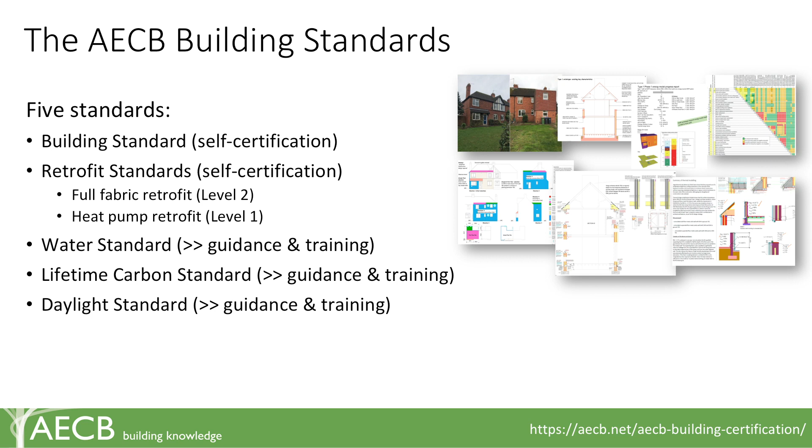We have a water standard, as you know, and then the lifetime carbon standard and the daylight standard are not actually certifiable standards as such. So we're going to be developing training to help people understand and deploy all of these standards in the next year. So that's where the direction of travel for training is.

So this new level 1 retrofit standard is based on the fact that we've challenged ourselves on the deep retrofit agenda. Deep retrofit is a very meaningful, useful thing to be doing, but it's not the only thing we should be doing. So we clearly need to get off fossil fuels rapidly. Heating by electric heat pumps offers an easy and potentially cheap route when combined with relatively light fabric retrofit. So it's not an intrusive approach, which a deeper retrofit obviously is, and that's what we're struggling with.

We do require good ventilation to be installed as part of that, and obviously we have an eye on the running costs after the retrofit, so we're trying to pay a lot of attention to the reality of the performance gap and make sure that after such a level 1 retrofit, heating costs are not higher than the fossil fuel system you've come off, so we're doing some economic modelling on that.

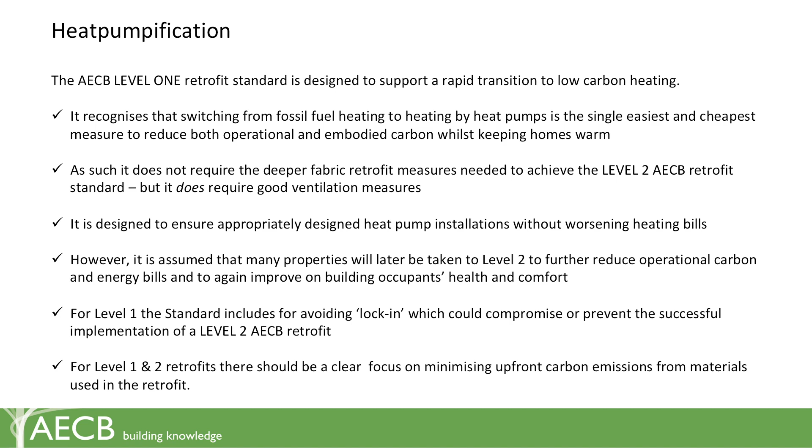We're not discounting going on to level 2, so level 1 is either a step towards a deeper retrofit, level 2, or those buildings at level 1 may well be sitting there operating on that level for years, 10, 20 years. And so we've been looking at what happens if we have 2 waves of retrofit, a level 1 and a level 2 over time, and I'll illustrate this in a minute. Is that still a meaningful thing to do?

Because one of the things we've been worried about in the past is people doing shallow retrofits which lock out future improvements. So the standard we've developed is designed to not block that second, deeper retrofit. So it's thinking ahead on a long-term plan.

So it's an overly complicated graph, but what it shows is the existing housing stock. And obviously what we need to do is to get that entire housing stock and shift it over here to reduce the space heat demand. So when you're thinking about reducing the need for heating, we have aspirational standards like EnerPHit, which will apply to a relatively small number of homes perhaps. I live in one, and it's very, very comfortable and very low energy. Very happy I did that.

The level 2 retrofit standard is less demanding, but still a meaningful and useful standard here, which is set at 50. Now, there are exemptions within the AECB level 2 for listed buildings or other very good reasons which we set out. So potentially, a certified level 2 retrofit could be demanding 100 kilowatt hours per square metre. So it's actually a range.

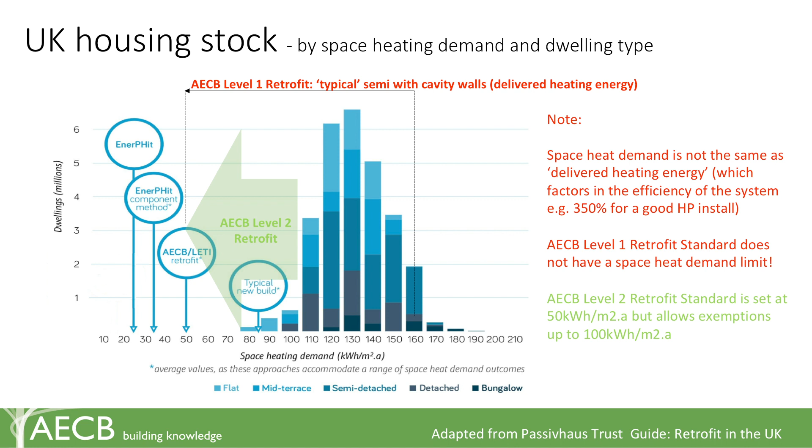We're using the efficiency, the very impressive efficiency of heat pumps to, in effect, reduce the heat demand through 350% well-installed heating systems. So this is the criteria by which you would certify to a level 1 retrofit. So I've just picked out the sort of key features here.

What we're doing is changing the heating system from a fossil fuel system or direct electric heating to a heat pump. We're thinking about forward planning, so we need a long-term energy plan, and that currently is using PHPP. The heat pump system, we're looking for that efficient installation. So we're talking about the relationship of the heat pump with the radiator, the heat emitters, the underfloor heating, or

the radiator sizes. And if we can get that right, and what we thought is the best criteria is actually setting the flow temperature for the heat pump designer to actually be low enough to get those efficiencies that we need to keep the running costs under control. So that's one of the criteria, flow temperatures less than 45 degrees. Controls is an important area we're still doing work in, but that probably will turn into some sort of criteria.

And air tightness, feedback from members about what is possible whilst not going deep into a building. What can you do from outside? You know, if your existing homes are around about, well, they could be already our target. Existing homes could be at 5, but typically they might be at 6, 7, 8, 9, 10, even 13 or more. So this is an important criteria, and we've set it at 5, whereas the level 2 retrofit is 2, passive house new build is 0.6, and EnerPHit is 1. So it seems like a doable and reasonable target, still stretching, and this is permeability.

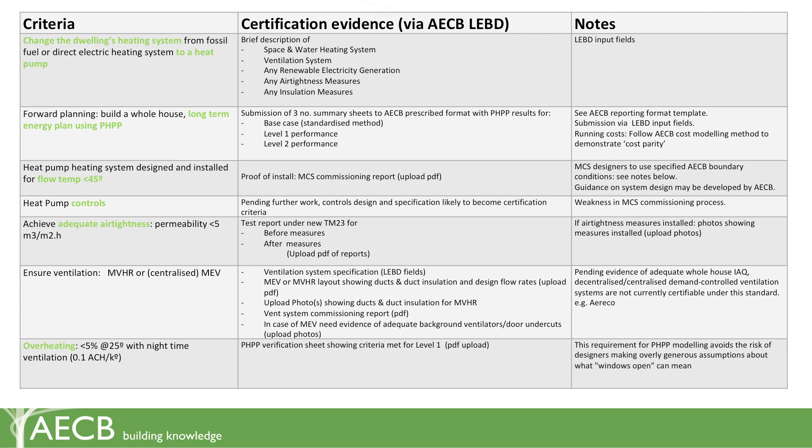We must have ventilation, so we're putting in sort of additional requirement to show that you've put in adequate ventilation to maintain good air quality, and of course there's an overheating criteria down here. So what I'm just going to show here is the background work we're doing to try to make sure that what we're suggesting is sensible, both in terms of individual homes and also what happens if it is scaled up, if it is ever scaled up.

So the models we're using are Passive House Planning Package for modelling case studies or archetypes. So a typical semi-detached house, is that cavity walled, is that solid walled, a bungalow, a mid-terrace townhouse, and so on. So generally we're working with 3 house types which represent different form factors. So the basic geometry makes retrofit quite challenging. So we've got a high form factor, a medium and a low form factor house type. And each of those will have either a cavity wall with insulation in place or solid wall. So we're looking at the extremes and trying to understand, does this standard fit a range of house types?

And then we've also tried to look at, if you add all of that up and you look at the English housing stock, what does that look like in terms of CO2 emissions? So we're well aware that the modelling we're showing is not saying this is what will happen, this will be the 1 million tonnes per year of emissions as a result of applying our standards. We're asking questions and trying to dig deep into how it works at scale and understand the issues of not only operation energy, emissions related to heating and powering a building, but also manufacturing the materials.

So here are the 3 typical house types we've used, and then we've chosen the cavity-walled, semi-detached house as the kind of easiest one that is most typical of housing across the UK. So it's actually a very useful house type to try to illustrate what a level 1 standard might look like. So for example, we talked about airtightness, so the semi-detached house you'd aim to get down below 5. We assume 50 mil of cavity wall insulation in place. If it's not in place, then it would have to be put in place. So there is a fabric measure there, but we're assuming this is a starting point, that there'll be some relatively poor cavity wall insulation in place, that there'll be some double glazed UPVC plastic windows.

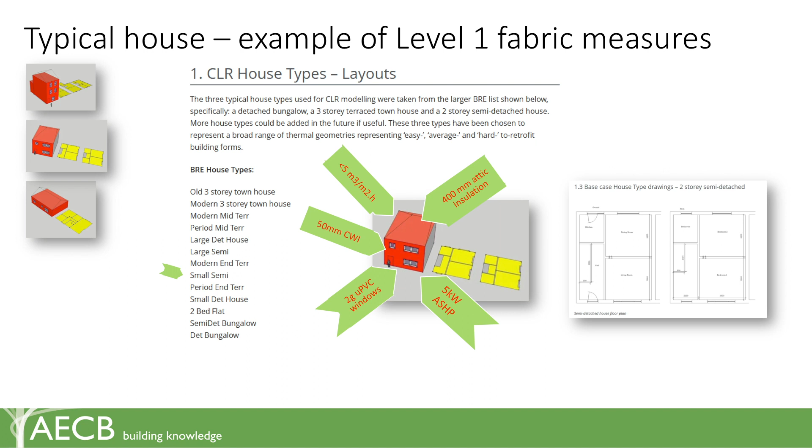Again, if they're single glazed windows, not many houses now have those, but that would also be another measure you would need to employ for level 1. And then basically on goes the heat pump. So that's a sort of package, with a topping up of attic insulation to around 400 millimetres, so that might require some attic top-up. So you can see it's potentially a lightweight, sort of light retrofit. So we're not insulating floors there.

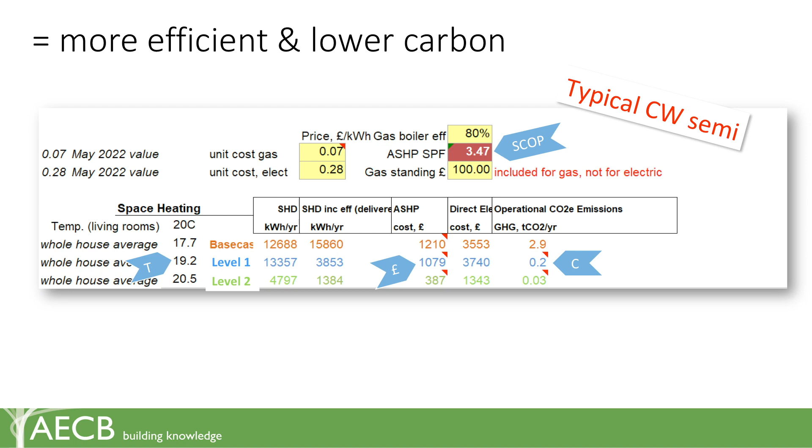And so the key things we're looking for from the people who model using PHPP: you will get an increase in average internal temperature. You will be looking to make sure that the electricity running costs are no more than the gas or oil that you've come off, so you need to keep your eye on that. And of course, we're looking at this very significant reduction in greenhouse gas emissions because you're going off gas onto electricity, the national grid is decarbonising, and these issues that we have been fretting about, how much electricity is going to be available to shunt 80% of homes from gas to electricity.

Can the grid cope with that? Well, it won't be able to cope with that without increasing the capacity. But at the moment, for the next 5, 10 years, we can get on with this. So there is an issue of peak heat demand, but we're not letting it get in the way of proposing we get on with this type of retrofit.

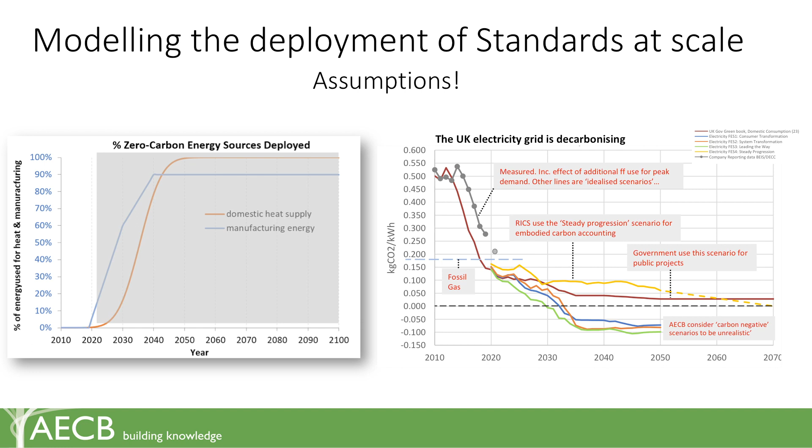We have to make some assumptions about the rate of decarbonisation of heating energy. We've built that into the model. We have to make some assumptions about manufacturing energy. We are assuming that over time, manufacturing energy will be decarbonised, whether it's use of hydrogen or electric arc furnaces for steel making and so on. Now, David's report looks at some of these aspects. So these are assumptions, and these have big effects on what happens. This is the proposed decarbonisation of the grid, and we're tracking what it actually looks like. So you can see there is a discrepancy between the aspirations coming from national grid modelling and the actual reality, so we need to factor that in.

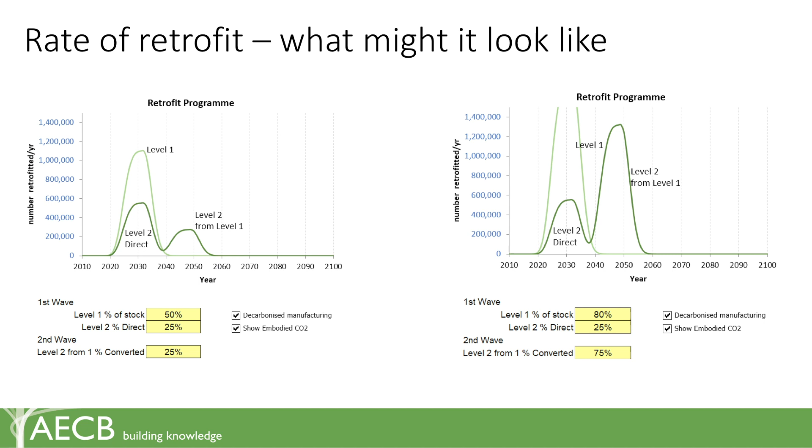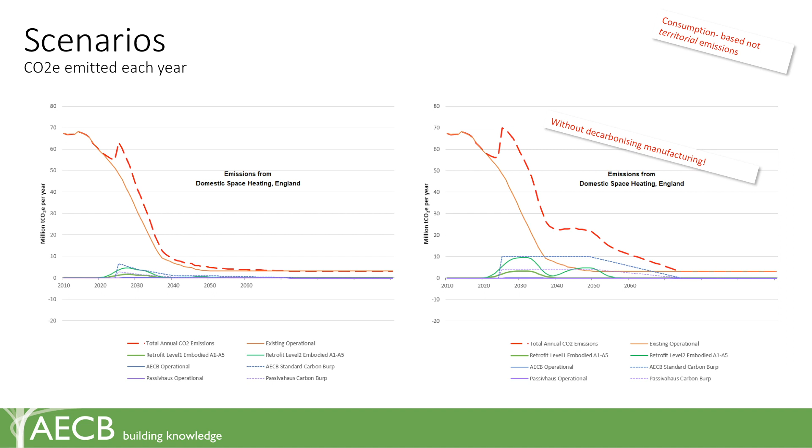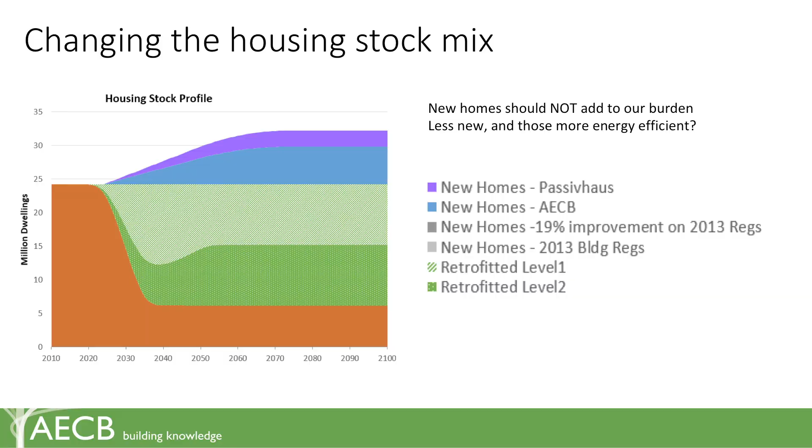And we can change the proportions of level 1, level 2 over time and start to ask questions about what that looks like. This is flicking between if you decarbonise manufacturing and if you don't. So you can see that if we don't decarbonise materials, it does have quite a significant effect on CO2 emissions. That's just showing how the mix of the dwelling stock would change under these different scenarios. So that's the existing housing stock, and we change the mix, level 1s, level 2s, and we're adding new housing, of course. So in this scenario, we said from somewhere around this point here, we really should be building AECB standard new homes or passive house homes. And there's a big debate about how many new homes we should be building or can afford ecologically to be building.

And then this is basically summarised in the stock model by looking at, do we get the scale and speed of CO2 reductions from space heating from our housing stock? This is just space heating. So down here you've got the embodied carbon emissions from the materials and heat pumps that you put into the structure, and this is the actual space heating CO2 emissions. So this is if we decarbonise manufacturing, this is if we don't. So you can see there's actually quite a significant effect here, carbon emissions from manufacturing, which does cause us a bit of an issue if we're trying to hit this trajectory.

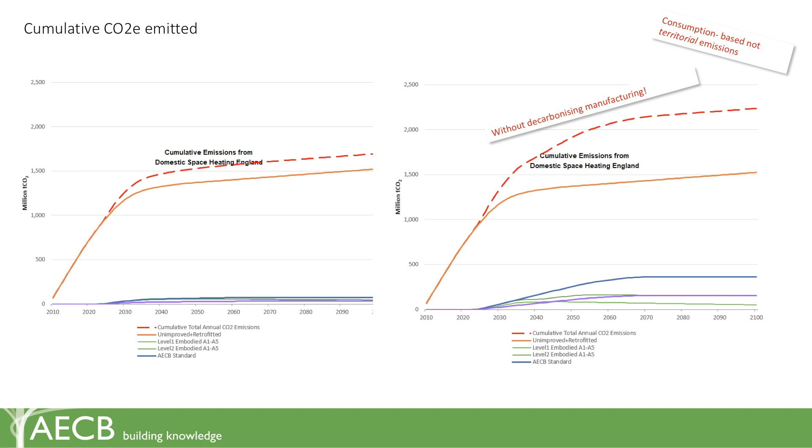This is what we need, according to Paris, something like this. And then that's the cumulative. This is what drives climate change, cumulative CO2 in the atmosphere, in this case from England's space heating emissions. So you can see that without decarbonising materials, we are struggling more than we are here. What we want to do is get that flat. We don't want to be adding any more. In this scenario, we're not.

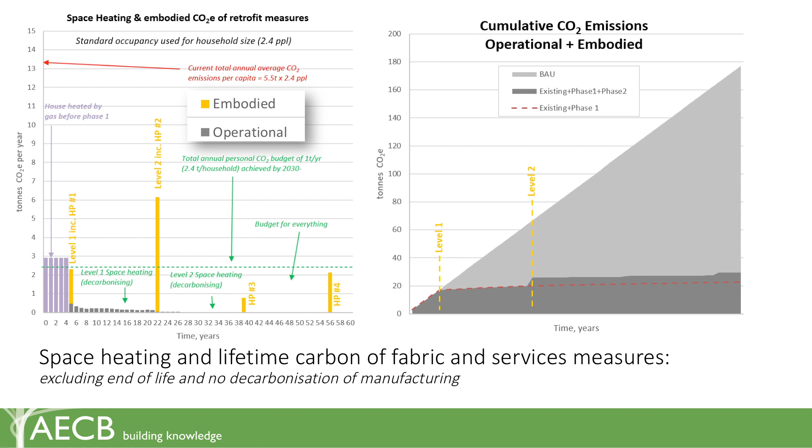So obviously we cannot stop. We have to continue to try and dramatically cut our emissions. We've just been talking about that. We have to focus as well on resource efficiency. So we end up with this sort of list of basic principles. If we don't need to build, or we can find another way to satisfy the client's brief that actually doesn't involve building, don't build. That's a very sensible approach. If we do have to build, look for opportunities to retrofit first to satisfy the brief.

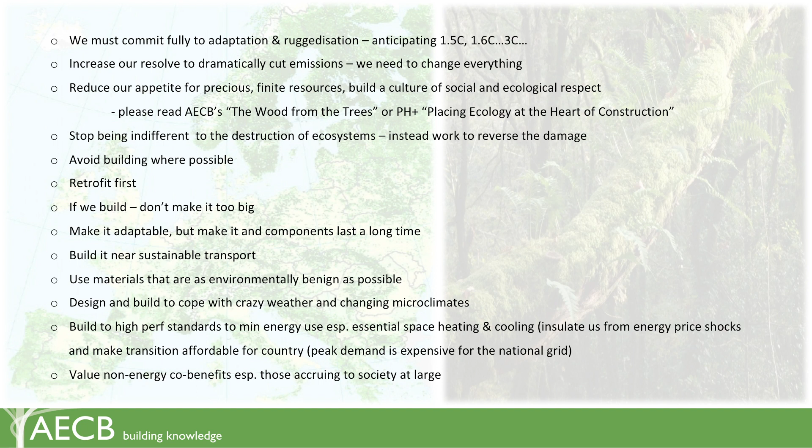If we do build or retrofit, don't make it too big. That's sufficiency, modesty. That's quite hard to sell to clients, but we do have to be thinking about that. Obvious things like making it adaptable, make the individual components last a long time. If we're using a lot of timber components, we don't want that coming back into the atmosphere sooner. It's later rather than sooner.

I really want to encourage all of you who are not working to the AECB standards to actually just start working to the AECB standards and get them certified. It really gives a clarity, whether it's a passive house, EnerPHit, AECB new build, or the 2 retrofit standards. Working to a standard and self-certifying it on the system gives a real clarity. It also helps with clients. Once the client has agreed to work to a standard, it gives you a much stronger hand when they're making last-minute changes. It's basically, no, it's falling out of the standard.

Right, so when you go around the conference, you'll see there's a couple of AECB assemblies where we've set a challenge, which is basically building 2 areas of difficulty for retrofit. It tends to be towards the bottom of a building where there are issues of moisture and ground and concrete slabs and all that sort of expensive stuff. It tends to get a little bit easier once you're out of the ground. So we concentrated on a suspended timber floor that you might find in a 1930s, 1940s cavity-walled house.

So that's what might be a lighter retrofit with a heat pump, where you might be looking for how you apply air tightness measures to floor perimeters. If you have an opportunity to insulate a suspended floor, you might choose to do that at this stage. You would expect cavity wall insulation to be in there anyway. So that throws up various building physics issues to do with air tightness and moisture and DPC. Those are the things you can look at and explore with ecological building systems in this particular instance.